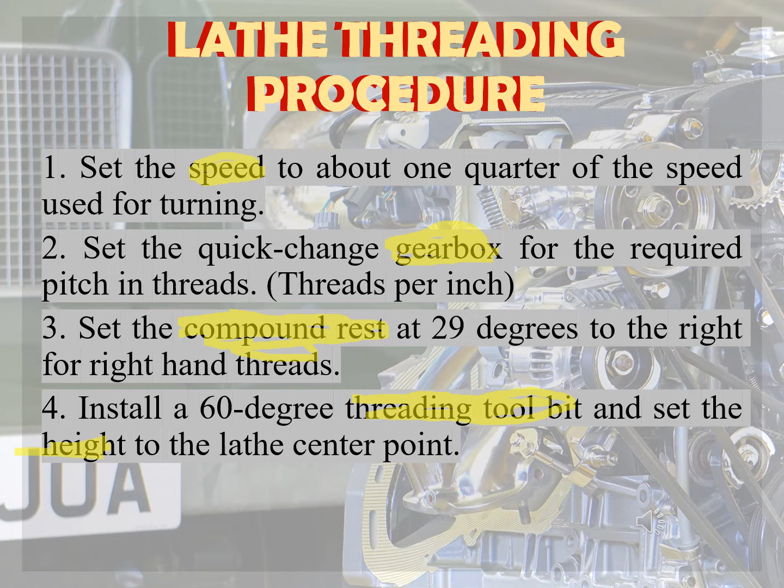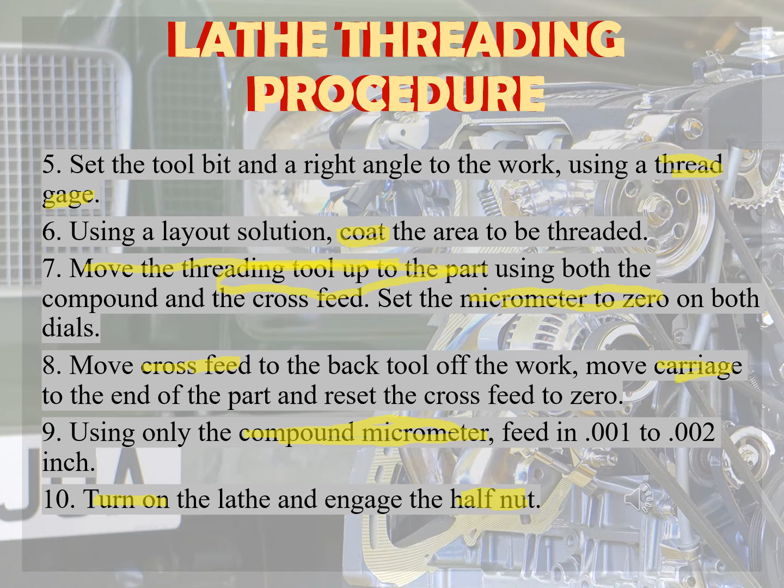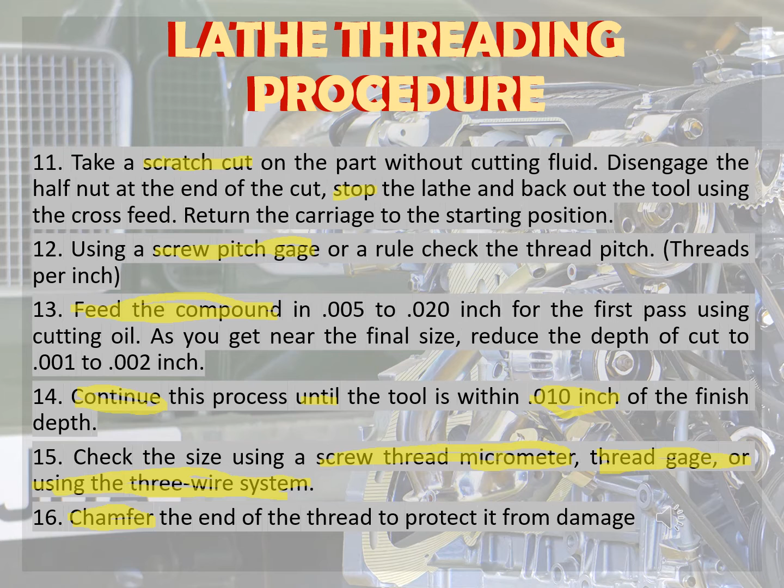So, ulitin natin bago tayo matapos. Unang-una is speed, then gearbox, compound rest, threading tool bit height, thread gauge, coat, move the threading tool up to the part and micrometer to 0, crossfeed and carriage, compound micrometer, turn on and half nut, scratch cut and stop, screw pitch gauge, feed the compound, continue until 0.010 inch, screw thread micrometer, thread gauge or using the 3-wire system, and chamfer. So, these are the steps in threading operation.

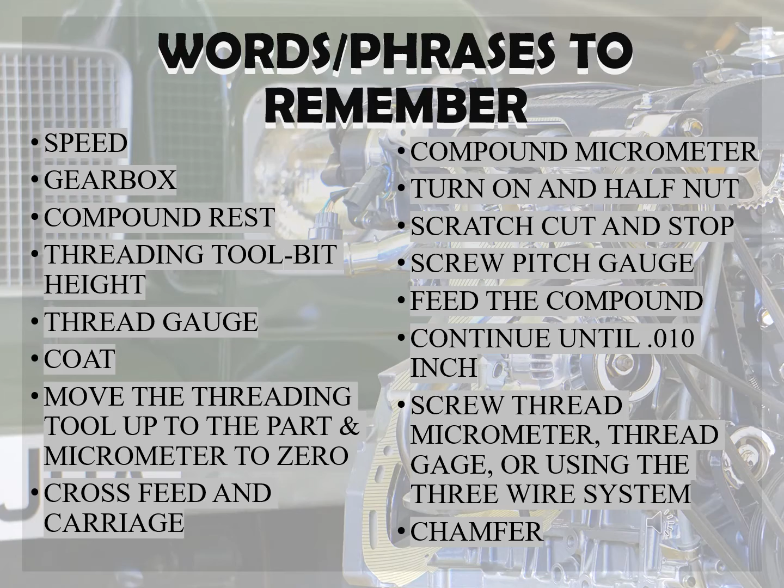So, as continuation ng reporting nung sinundan namin na group, kila Boko, we will proceed na po sa thread-related computations. Before that, I will provide some review or recall muna dun sa ilang terms po when it comes to threading.

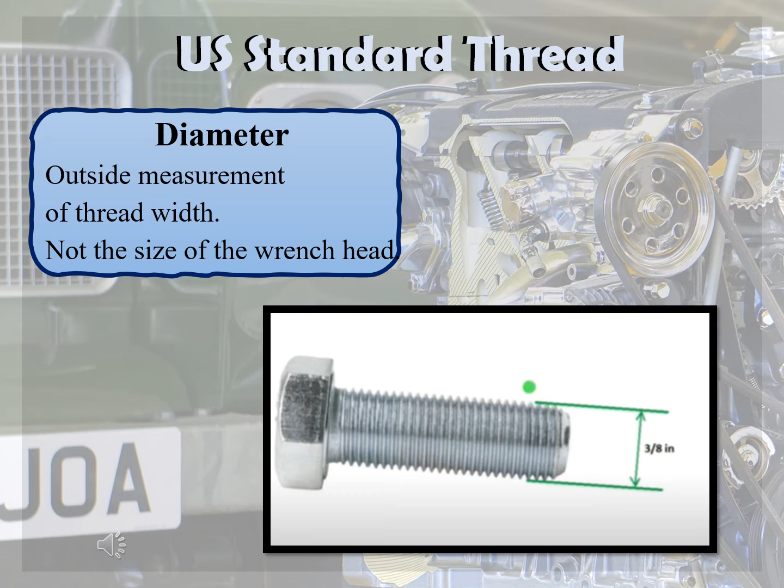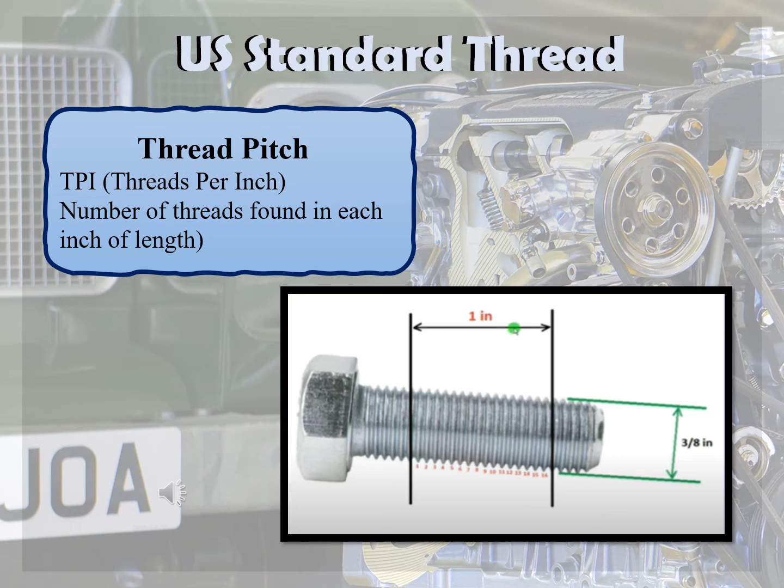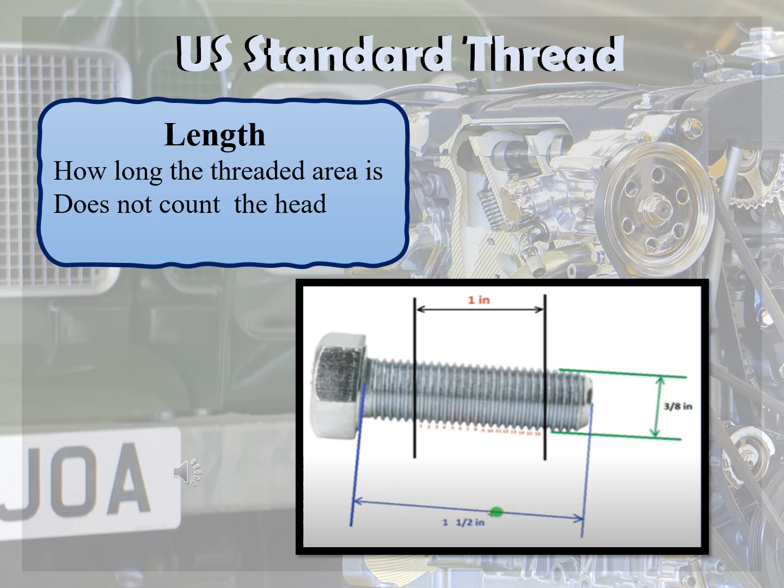Problem number 1, calculate the pitch, depth, minor diameter, and width of flat for a 3/4 major diameter by 10 TPI Unified National Coarse Thread. So, yung D dito stands for single depth of thread or simply the perpendicular measure between the crest and the root of the thread. Then, we have P naman for the pitch. By getting the pitch, first we have to convert it from fractional to decimal form. We will use the formula 1 over thread per inch. So in this example, we have 10 threads per inch. So by plugging in values, the answer will be 0.100 of an inch.

Then second one, we have the depth of thread. The value of 0.61343, as you can see, is the standard depth of thread considering the 70.7 depth from the 100% full thread depth.

The value of 100% depth of thread is equal to cosine 30, which results in 0.86 something. Multiplying it to 70.7% gives us the depth of thread of 0.61343, which is usually used for the standard thread. Then for metric thread, we'll use a different value for depth of thread, so it's different. For US standard thread, we use 0.61343, then multiply by the pitch value, 0.61343 times the pitch which is 0.100, equals 0.061 inch. This is the depth of thread for this example.

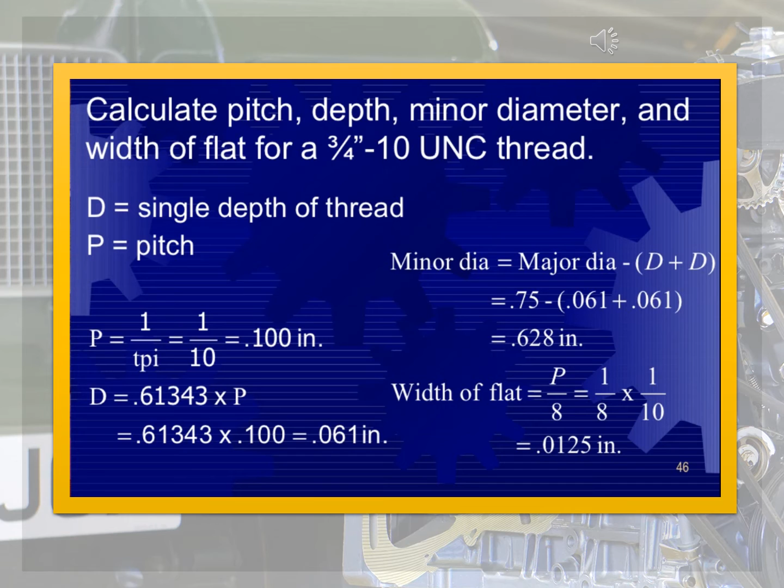Now let's proceed to metric thread. First, we have diameter, which is defined as the distance between outside of threads, measured in millimeters. So the difference from standard is that millimeters is the unit used, not inches.

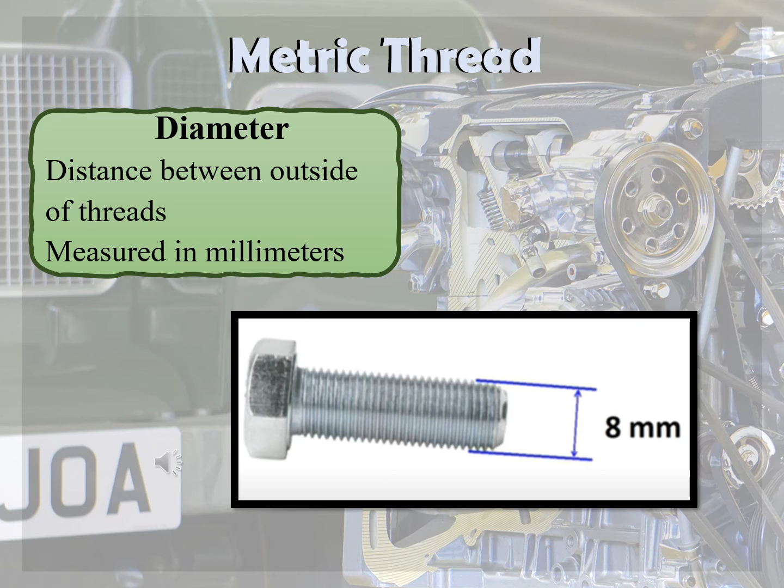Then thread pitch. Thread pitch is the distance between threads crest to crest, also measured in millimeters. The difference from UN standard thread is that what is measured here is the distance between the two crests included in the measurement. Unlike in thread pitch of standard thread, where we have to count the number of threads included in 1 inch of measurement, here it's measured in millimeters.

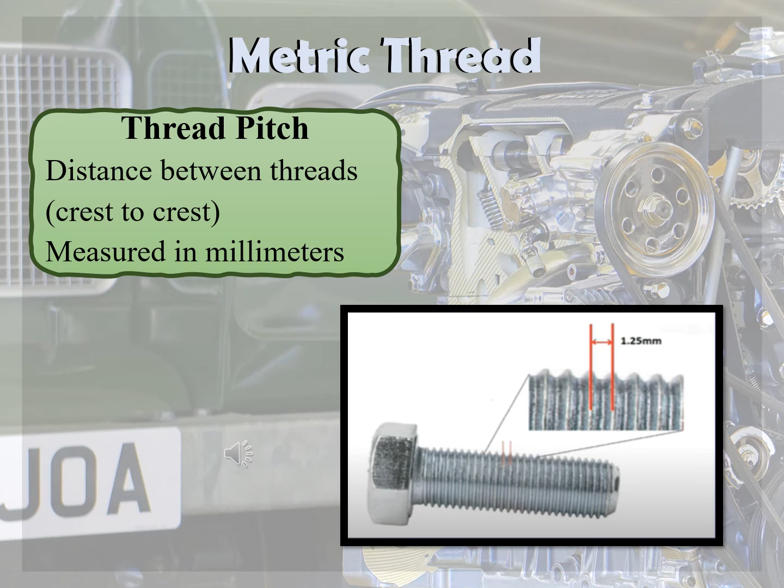Third, we have the length, how long the threaded area is, which does not count the head. So the wrench head is not included.

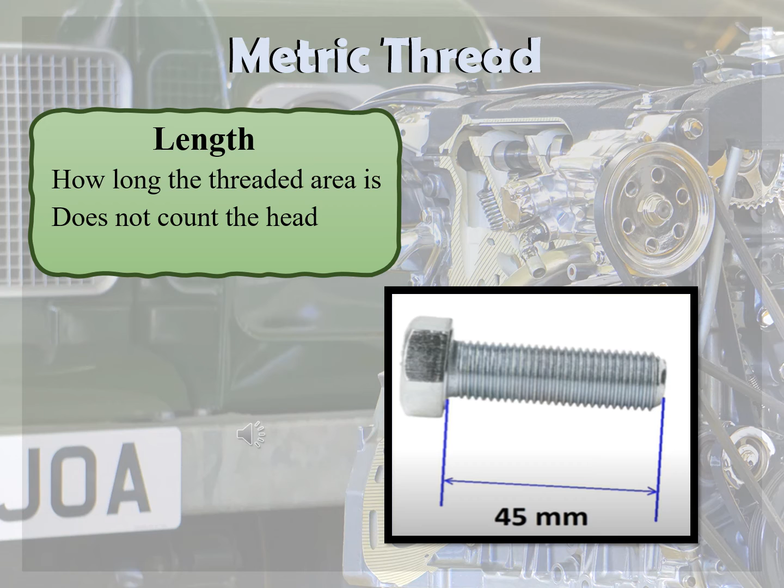Let's proceed to example number 2. What is the depth, minor diameter, crest, and root for an M6.3 times 1 metric thread, or metric thread 6.3 by 1? The P is equal to the pitch, which is 1 millimeter. Then we have the depth of thread, which is 0.54127 - this is the other equivalent of depth of thread when solving for metric thread. For UN thread or US standard thread, we use 0.61343. For metric depth, we use 0.54127.

Multiplying by 1 gives us 0.54 millimeter, rounded up. Then also for minor diameter, we have major diameter minus the quantity of depth of thread plus depth of thread. By plugging in values, 6.3 minus the quantity of 0.54 plus 0.54, which is equal to 5.22 millimeters.

Then the width of root: width of root is equal to 1/4 of the pitch, which is equivalent to 0.25 in decimal times pitch. So 0.25 times 1 millimeter of pitch gives us 0.25 millimeters. This is the width of the root in the lower portion of the thread.

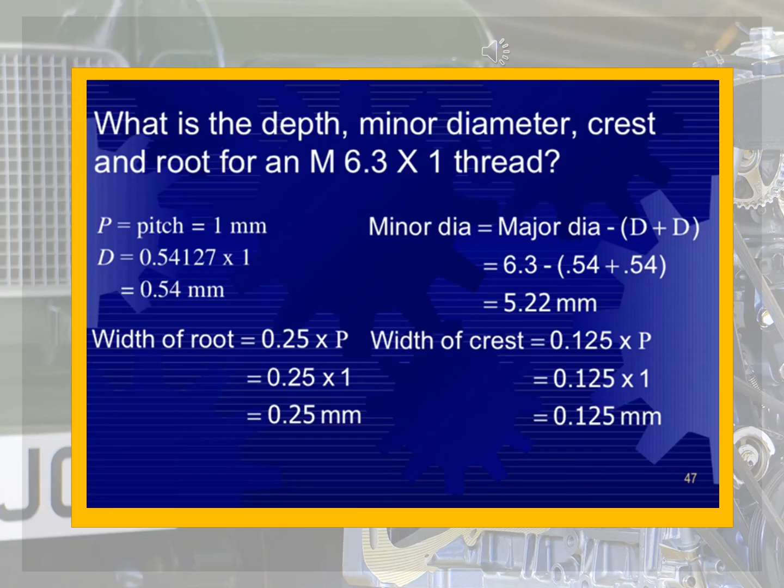Hi guys, so after discussing the computation, the thread related computation and the threading setup, today I will be discussing - me and Rolly will be discussing multiple threading. Before we proceed to the main topic, which is the difference between multiple threads, single threads, double threads, and triple threads, first I will be discussing the terminologies - these are the terms we will encounter throughout the discussion.

First is the external or male thread. It is a thread on the outside of a cylinder or cone. Based on this definition, basically this is the thread that is on the outside. An example of this is the bolt.

Next is the internal or female thread. It is a thread on the inside of a hollow cylinder or bore. This is the partner of the bolt, which is the nut. The nut is like a ring that has thread inside, just like in the picture example.

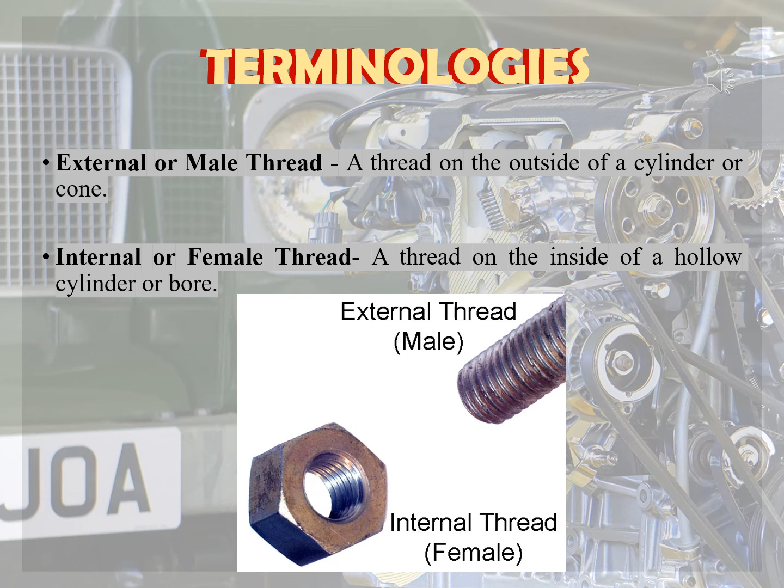Next is the pitch, or the P that we see in the example. It is the distance from a given point on one thread to a similar point on the next thread, measured parallel to the axis of the cylinder. So the pitch in inches is equal to 1 divided by the number of threads per inch.

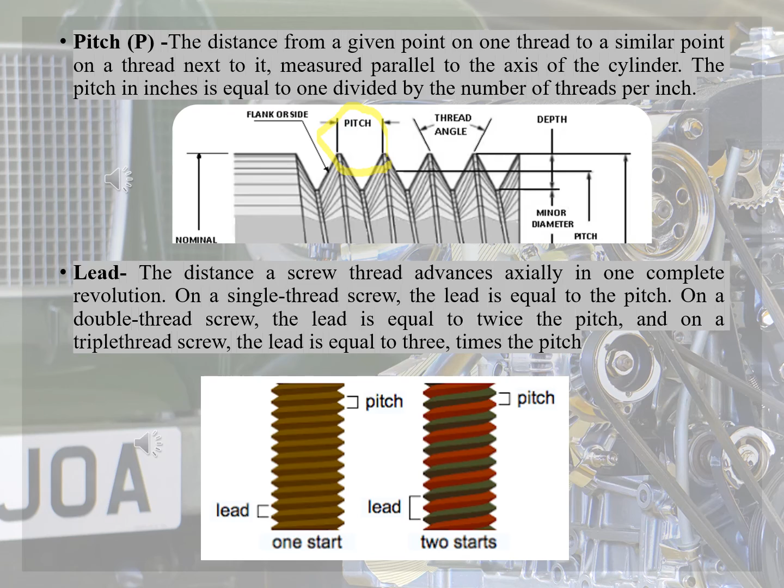Next is the crest, also known as the flat in other terminologies. It is the top or outer surface of the thread joining two sides. This is what we see here, like a mountain shape, like an inverted V in the picture, and at its peak, that is the crest.

Next is the root. The root is the bottom or inner surface joining the sides of two adjacent threads. This is the lowest part of the thread, the lower part between two adjacent crests, like a V shape, the lowest point.

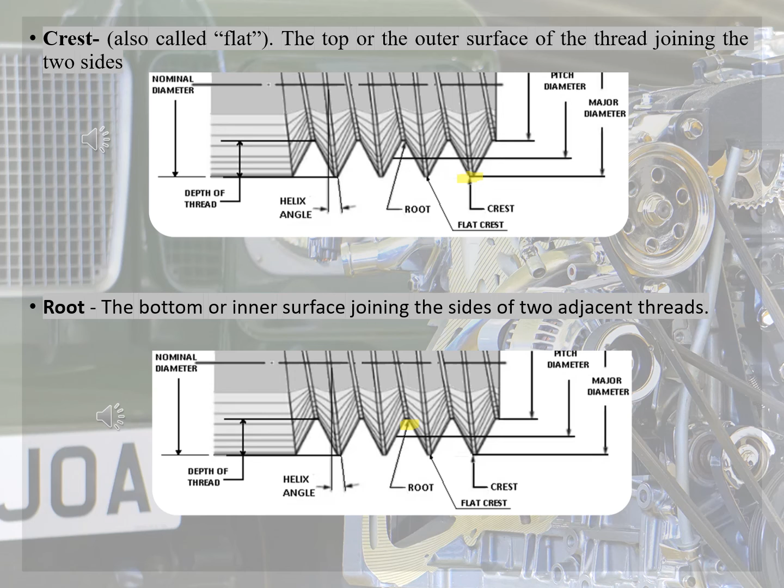Next is the side. The side of a thread is the surface which connects the crest and the root. Based on the picture, the side is the edge of the crest and the root, the part that looks slanted. That is the side part of the thread.

Next is the thread angle. It is the angle between the sides of adjacent threads, measured in an axial plane. For most threads, the angle is fixed at 60 degrees, which is constant. There's also another angle of 55 degrees used in British standard, known as the British Standard Whitworth threads. This is the measurement of the angle of the thread itself.

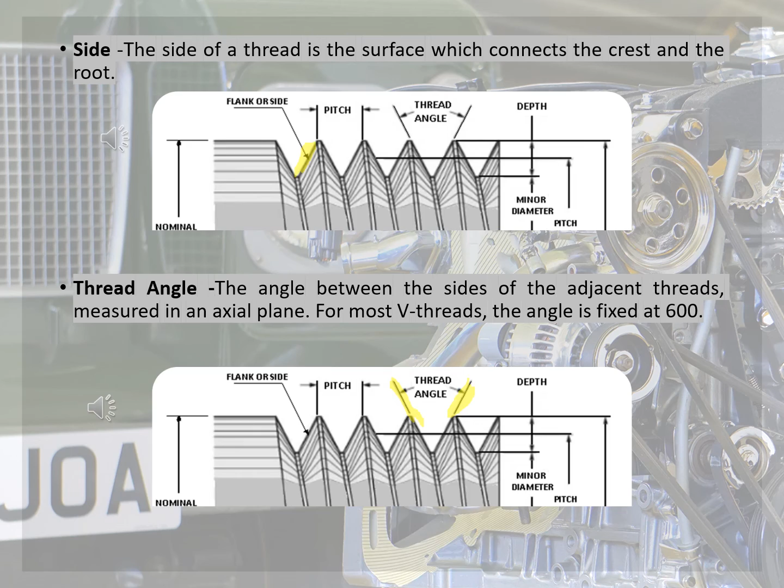Next is the depth. The depth of the thread is the distance between the crest and the root, measured perpendicular to the axis. This is the distance from the crest, the top of the thread, to the lower part, the root. So it is the distance from the crest to the root.

Next is the major diameter, or D. The major diameter is the largest diameter of a screw thread. It is the distance from the upper crest, the top, to the lower crest, basically the size of the cylinder itself.

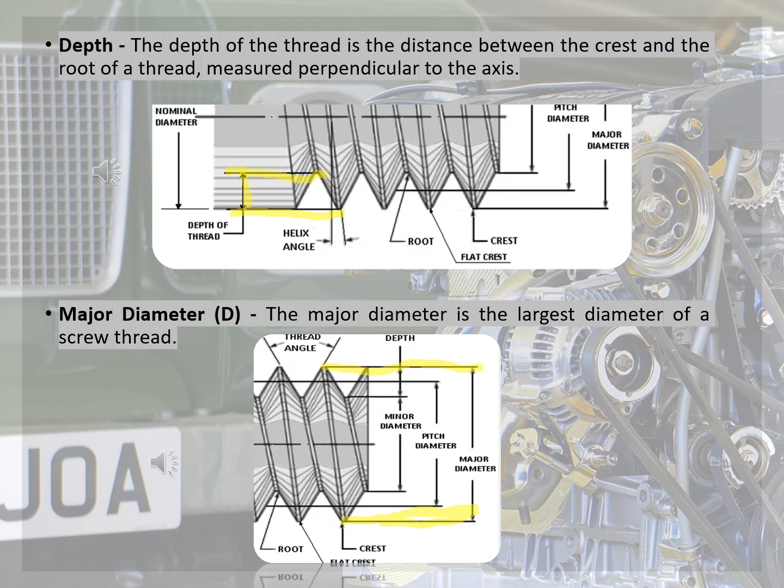Next is the minor diameter, or K. The minor diameter is the smallest diameter of a screw thread. It is the size from the root to the other root. So this is the smallest diameter size of the thread.

So last is the pitch diameter. The pitch diameter is the diameter of an imaginary cylinder formed where the width of the groove is equal to half of the pitch. This is the critical dimension of threading, as the fit of the thread is determined by the pitch diameter.

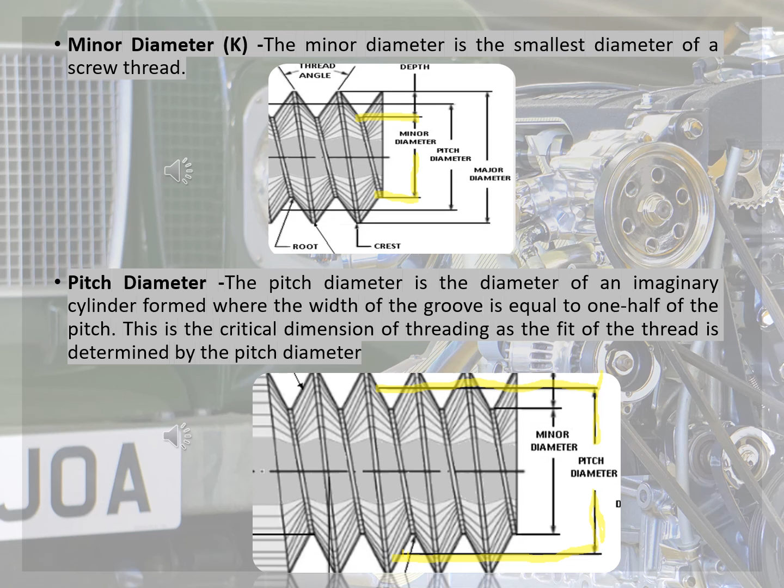After discussing the terminologies, we will now proceed to the multiple threads. There are 3 types of multiple threads, though I've seen another one added. The first is single thread or single start. Next is the double thread or double start. Third is the triple thread or triple start. In other books or references, there's one more, which is four threads.

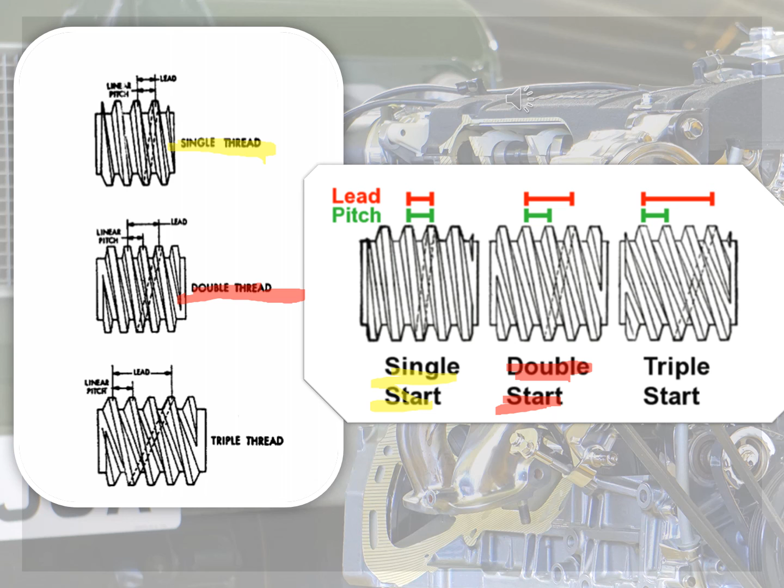Last but not least is the triple thread or triple start thread. Its definition is one of 3 equal parallel threads on the same screw, with each thread being 120 degrees ahead of the next succeeding one. Compare this to the double thread, which has 2 parallel threads of equal dimensions on the same screw, one of which is 180 degrees ahead of the other.

Now I'm going to discuss the difference between single thread, double thread, and triple thread. But before that, a multi-start thread consists of 2 or more intertwined threads running parallel to one another. These intertwining threads allow the lead distance of a thread to increase without changing the pitch. So the double-start thread will have a lead distance double that of a single-start thread at the same pitch, and the triple-start thread will have a lead distance 3 times longer than the single-start thread of the same pitch, and so on.